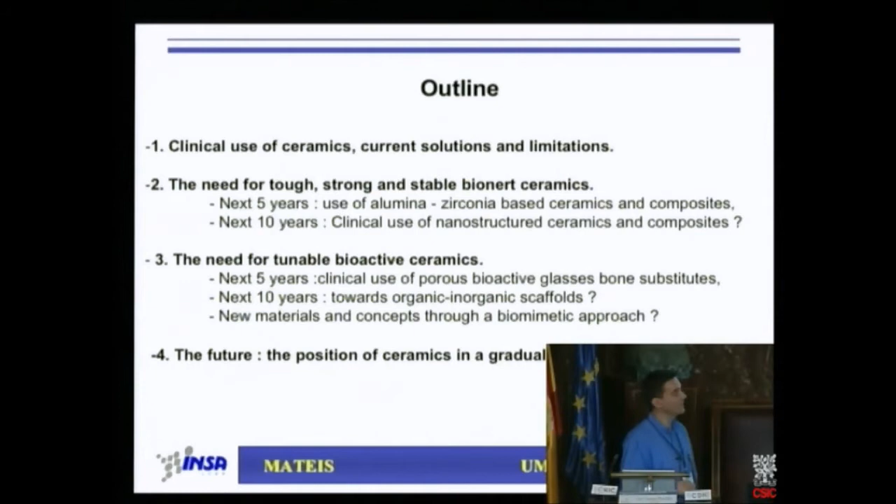So we foresee for the next 5 years the use of alumina zirconia-based ceramics and composites, and maybe in the future clinical use of their nanostructured versions, so nanostructured ceramics and composites. And then I will go towards the need for tunable bioactive ceramics with the use of porous bioactive glasses bone substitutes, the use of organic, inorganic scaffolds, and new materials and concepts through biomimetic approaches.

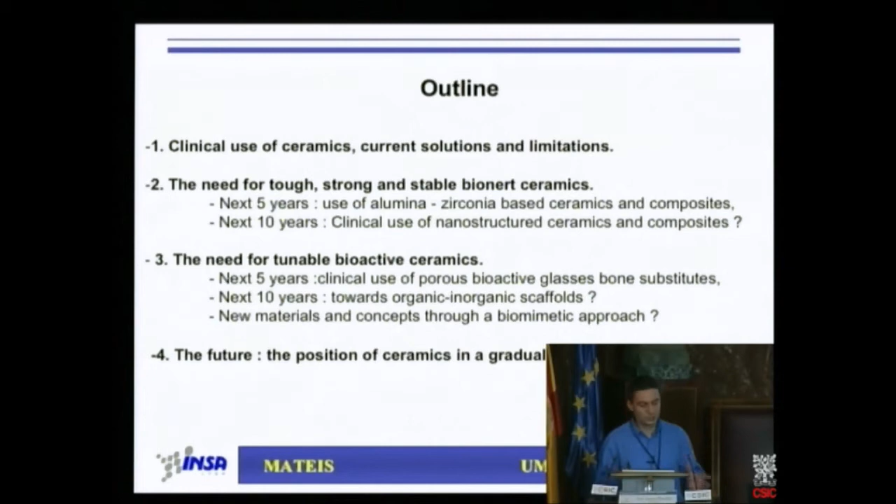And then I would like to conclude my talk with what could be the future position of ceramics in a gradual surgical approach. So we have already talked about ceramics for hip joint application, but just let me summarize what are the specifications for this use. So as you know, ceramics have been used in the form of alumina, mainly alumina, and also, let's say in the 90s, with YTZP. So bioinert ceramics are used for hip and foreseen for knee joint applications, and today we use alumina and still some companies sell some zirconia.

So the specifications are quite demanding, because we use ceramics for the femoral head and for the cup, and so we have to resist wear, so that's the first issue and the main issue in orthopedics. So these are two bearing surfaces. As we said before, ceramics are well suited since they have low roughness, also low wetting angles, high hardness, so low wear rate. We have also to resist significant mechanical loading, especially when you are walking or running.

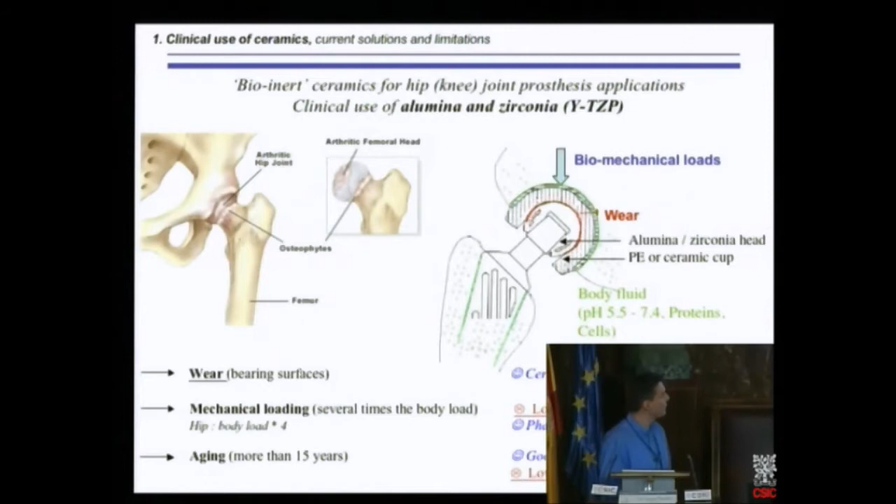You have several times the body load which is applied to the hip joint. For example, for the hip joint, only by walking, this is 4 times the body load. For the knee joint, it can be 6 to 8 times the body load. So that's quite significant and demanding mechanical loading. So as we said before, alumina has a modest crack resistance, and that's why YTZP was used in the 90s because of phase transformation toughening.

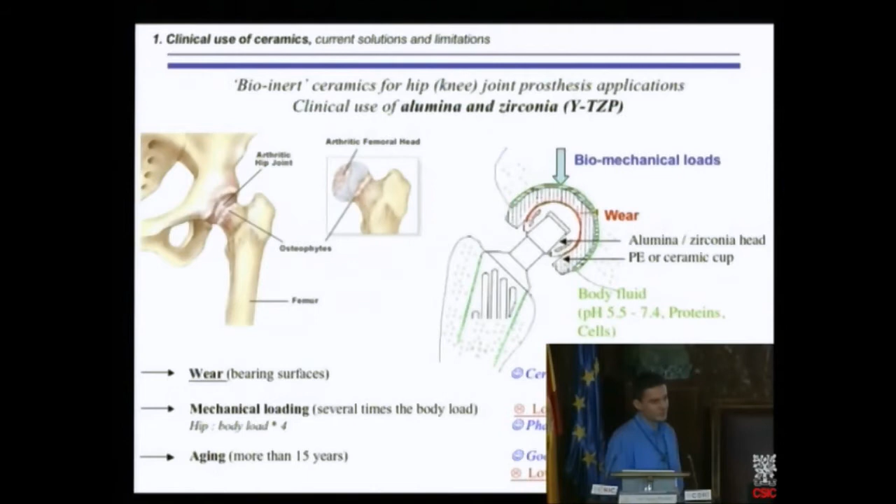And of course, the material has to stay in the body for more. We expect more than 15 years. So it should be stable all along this life. So there should be no aging, no change in the material within 15 years or maybe more for the next generation of prostheses. So ceramics are inert, we know that, but we have to talk about low temperature degradation of zirconia also. So we have seen this before in my first presentation.

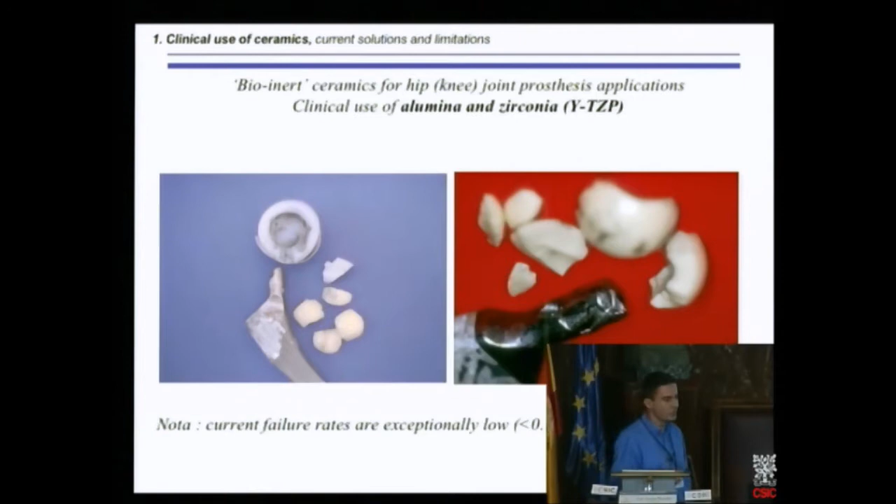We can have some failures. The failure rate is very low, less than 0.1%. We said for Biolox alumina, for example, 0.02%, so that's quite low. But we are limited in terms of designs with alumina. So we have designs which are limited in the case of alumina. We have also talked about slow crack growth. That's another important issue. I won't go again into details in the process, but we know that ceramics are sensitive to slow crack growth, so we need ceramics with a higher resistance to slow crack growth.

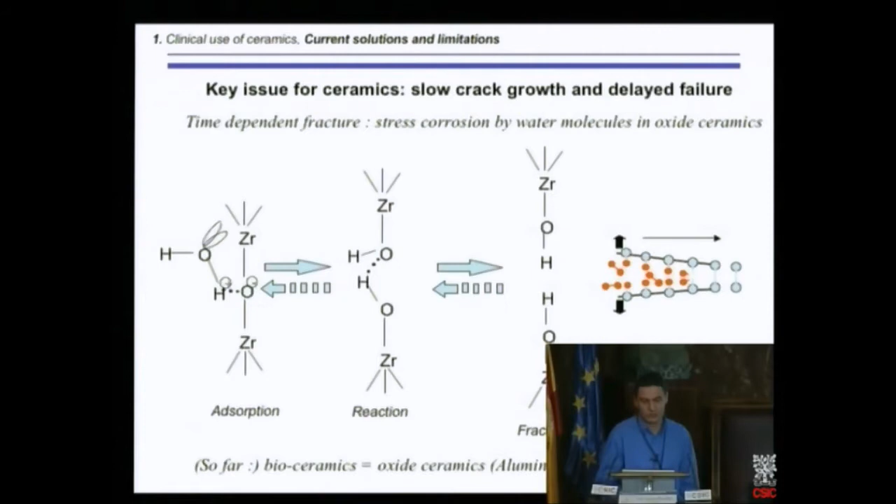If we take biomedical ceramics, unfortunately, they are all oxide ceramics. Alumina, zirconia, hydroxyapatite, tricalcium phosphate, all calcium phosphate-based ceramics are also oxide ceramics. So we expect that so far, all bioceramics are intrinsically sensitive to slow crack growth, especially stress corrosion by water molecules. We also investigated that aspect, and we said that it was important to investigate the threshold below which no crack growth should occur, and of course the toughness. But for delayed failure, what is more important is the threshold.

And we can say that there will be no fracture at all, no risk of fracture, if the applied stress at the implant is everywhere lower than a limit, which is quite simple to calculate. This limit is given by the ratio of the threshold, KI0, upon the square root of the crack size. So we can play a role on the process, because the crack size is here, and we can play a role, and we have shown that before, on the threshold below which no crack growth occurs.

So we know that a larger threshold will mean a larger range of designs without any risk of delayed failure. And so the current solutions now have low failure rates, but on a limited range of designs. We are not able to make alumina 22mm heads. There is a risk of failure. We are afraid to use alumina alone to make knee joints.

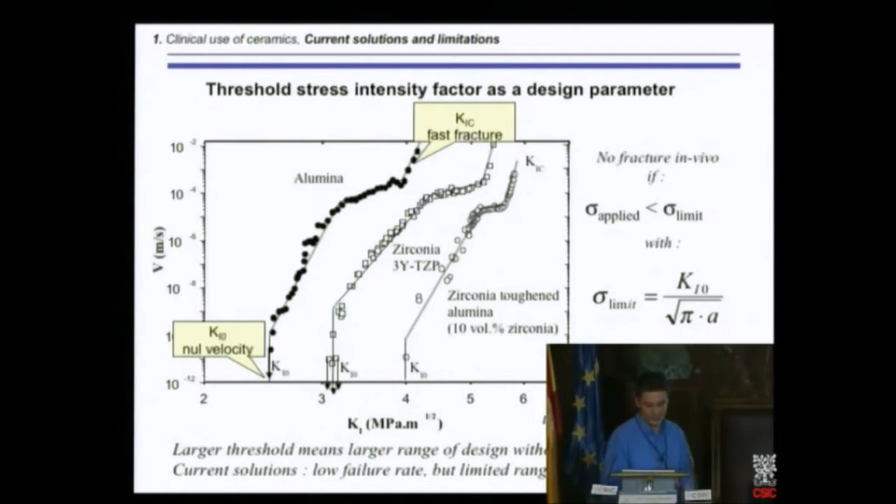And people said, it should be no problem in vivo because you are working at 134 degrees C, so much higher than the in vivo situation. But what we expected at that time is that due to water, there is a transformation of the grains at the surface. So imagine there is one grain at the surface in contact with water. This grain is transforming. Due to the transformation, you have microcracks and tensile stresses on the neighbors. So the neighbors are transforming. And neighbor by neighbor, the transformation occurs.

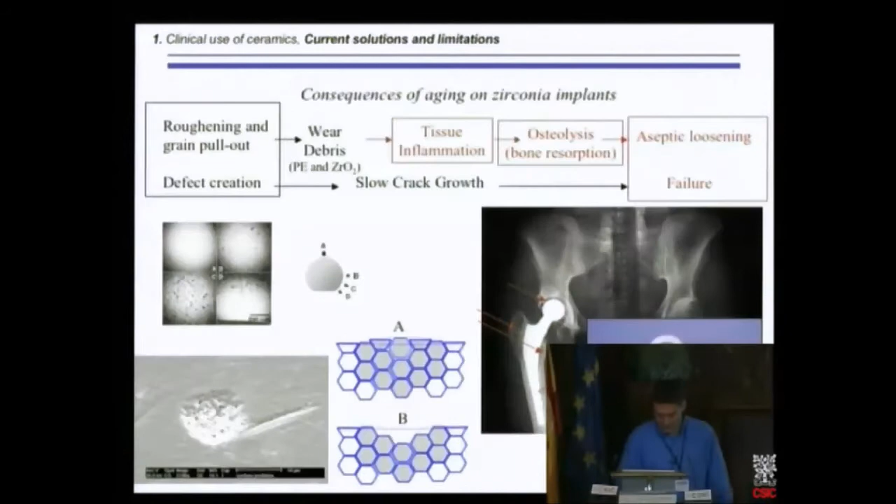What are the consequences of aging of zirconia? First, we have surface uplift, because remember that phase transformation occurs by an increase of the cell of the zirconia, so an increase of the volume of the grain, there will be some surface uplift with time. We see it clearly here. This white zone is related to surface uplift. So if you're wearing against polyethylene, for example, you have a wear rate increase of the polyethylene due to this surface roughening of zirconia. That's the first point.

Also, this is a micro-cracked zone because we said that the grain, while transforming, leads to microcracks all around the area. So grain pull-out is quite easy. So roughening and grain pull-out. Here is the surface of zirconia femoral heads after some years in vivo. Not many years. I don't remember exactly, but 3 to 4 years.

What you see is that you have some craters at the surface of the zirconia implant. This is due to the fact that this transformed zone has been pulled out, and you have a lot of pull-out, and this crater means transformation, and so this grain pull-out. So the consequences of aging are clearly roughening and grain pull-out. This means wear debris, and remember what we said in the first presentation. Wear debris means tissue inflammation, bone resorption, and then aseptic loosening, and the need to change the hip component.

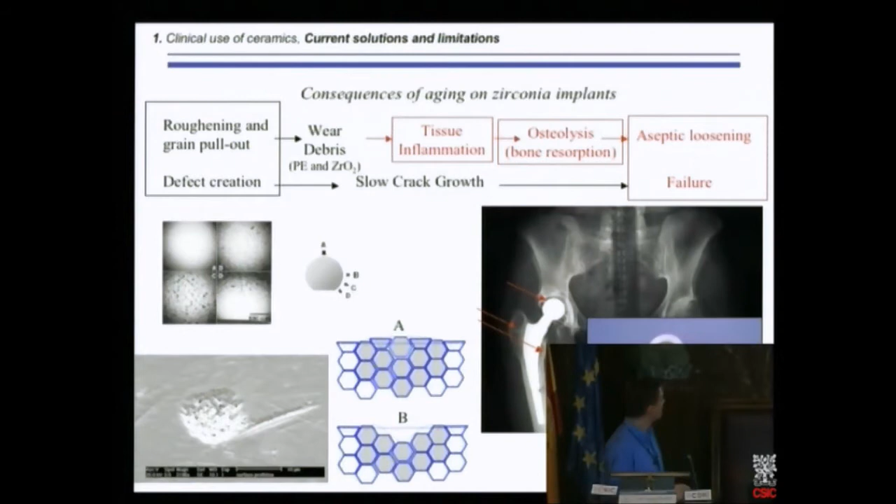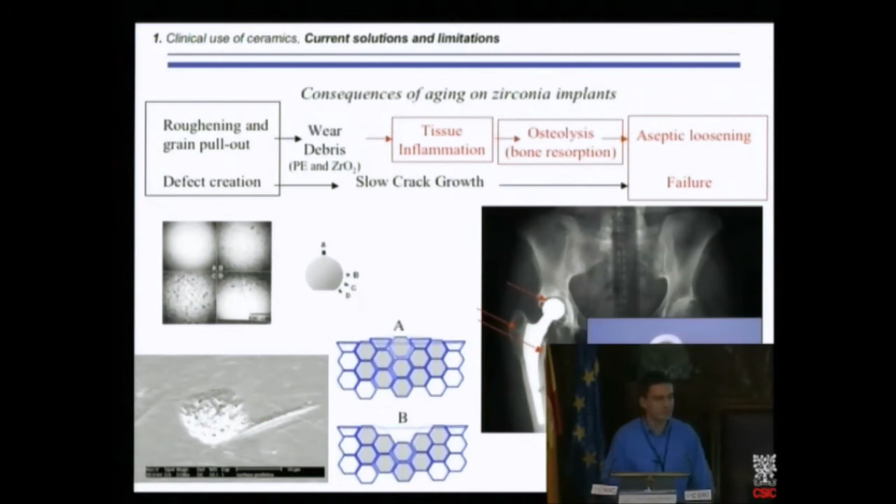Another important and maybe catastrophic issue is that you create defects. A crater like that is a big defect, 10 microns or more in size. You have to remember that it's a large flaw, much larger than the grain size, for example. So this large flaw can propagate due to slow crack growth, and then you mean delayed failure. And that's the case, for example, of Saint-Gobain Desmarquest prostheses in 2001 and 2002. So defect creation means slow crack growth and risk of delayed failure.

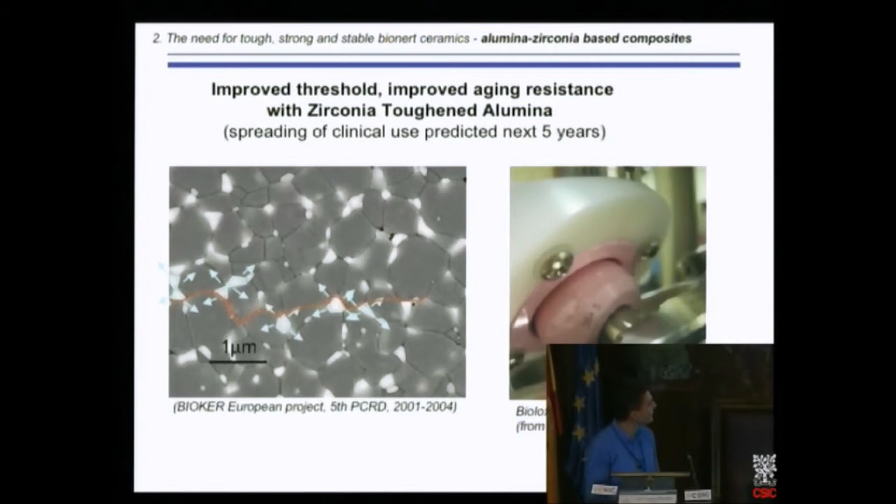So we want tough and strong ceramics, but we want also stable ceramics. So that's why we said maybe we can use zirconia toughened alumina. So that's the first strategy, and it's already under clinical use from CeramTec in the form of Biolox Delta ceramics. So this is a Biolox Delta ceramic mounted on a hip simulator. The pink color is due to an addition of chromium, but it's quite a standard classical alumina zirconia composite.

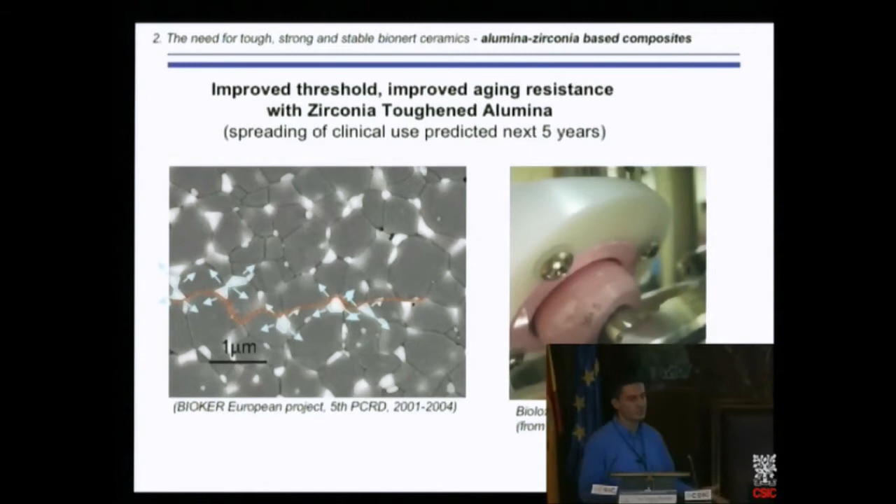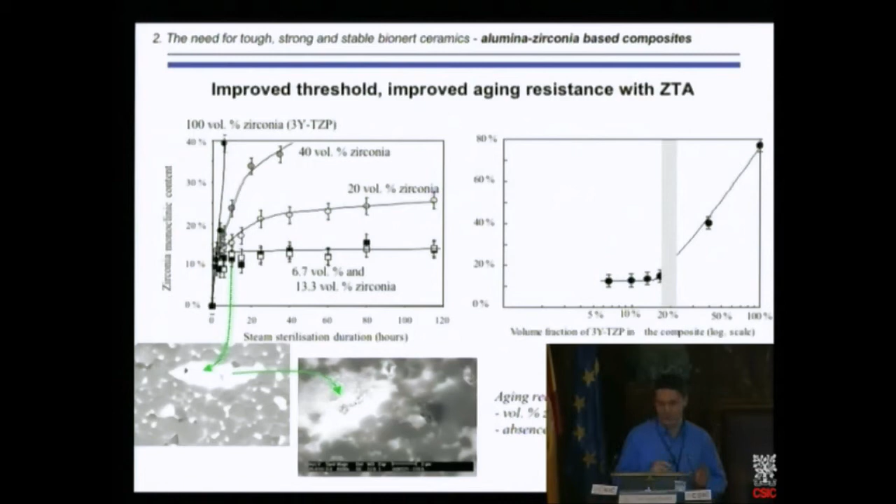I just want to emphasize these two graphs in which I have an alumina zirconia composite in which we have quite large zirconia aggregates. Unfortunately, with this composite, you will have aging of these aggregates. So if you process an alumina zirconia composite, you will need to have a perfectly homogeneous dispersion of these zirconia particles inside the composite. If not, you will have aging of the zirconia aggregates. So it is before aging, not the same aggregate, and after aging, this zone has been degraded by aging. So alumina zirconia composites can be a first answer to toughness, strength, and good stability.

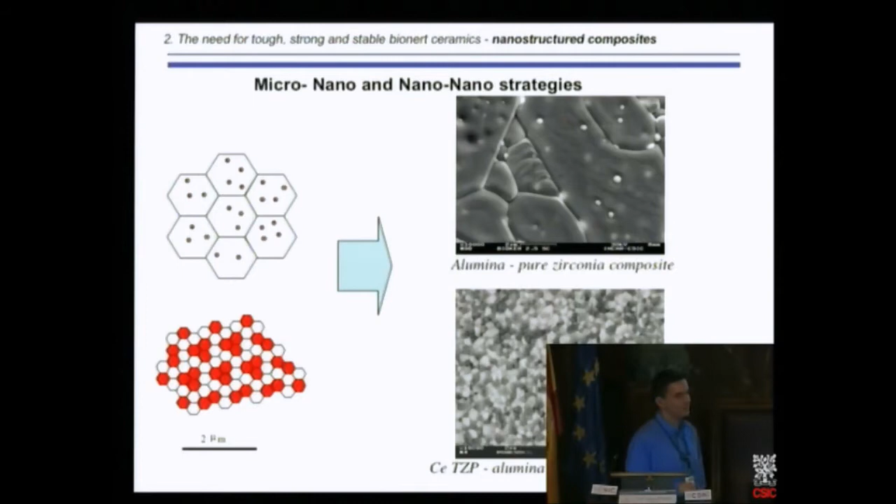I think someone said before that within the NANOKER project especially, we are able to process nanostructured composites without handling real nanopowders. So the idea of partners in the NANOKER project is to post-dope a powder, let's say an alumina powder, with a precursor of zirconia. It can be an alkoxide, or it can be also inorganic salts.

Then you post-dope submicron alumina, make thermal treatments, and by these thermal treatments, the precursor forms first a vitreous phase, an amorphous phase, and then increasing the thermal treatment, you have zirconia particles strongly attached to the alumina, which are formed with temperature. And playing with the temperature of the thermal treatment, you can change the amount and especially the size of the zirconia particles. So you can really tailor your micro-nano powder with the thermal treatments quite easily. And you do not handle any nanopowder, since this is a micro powder and a precursor.

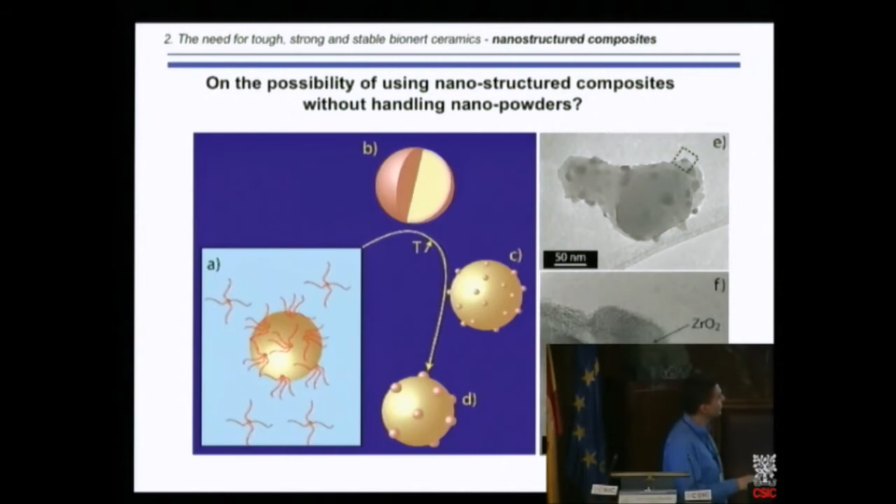And then you obtain something like that, in which you have an alumina grain, in which you have zirconia grains which are strongly attached, really nano zirconia grains which are strongly attached to the alumina powder. So with this kind of strategies, you obtain real materials like that.

Here is V versus K1 curves. I've bored you with this V versus K1 curve today, but that's important for implants especially. This is alumina, YTZP, so current solution in orthopedics, I think also in dental field. This is conventional ZTA, and this is the nanomicro and the nanocomposites. So with both, we have a strong increase of the threshold.

So we have now clearly new options for future ceramic implants. This means if we have larger threshold, we have wider range of designs. We will be able to process hip and knee resurfacing implants, which are minimally invasive. Again, I can see this poster. This is a minimally invasive implant, resurfacing implant, much less invasive than current implants. And we foresee the first clinical use of ceramic knee prosthesis based on that composites.

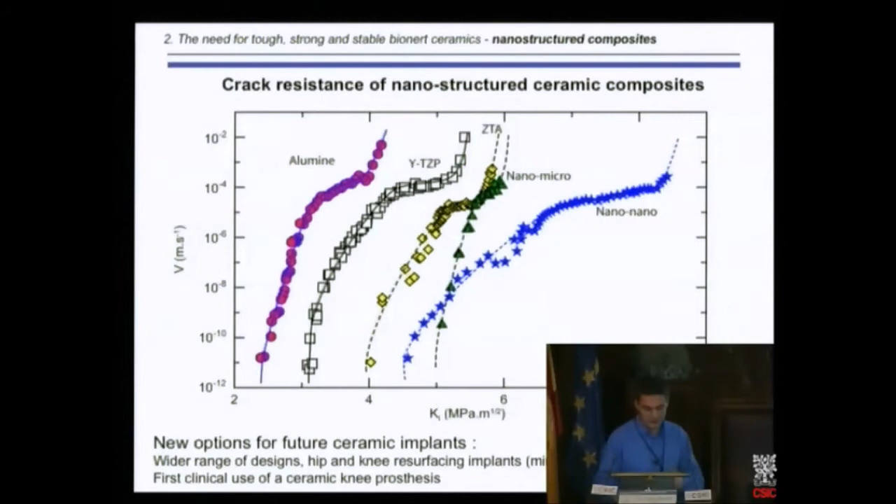So what about the resistance of real parts? Because I said before, okay, you can show nice strength, nice toughness on small samples. What about components? So we have made some crack resistance, load to failure of these nanostructured versions of ceramic composites. And the FDA standard approach to do so is this way. It's quite a simple compressive test, burst test, in which the femoral head is here, and you push towards the metallic taper until the ceramic breaks.

So what about these new alumina zirconia nanocomposite prototypes versus current alumina and current TZP ceramics? So here is the load to failure of commercial alumina. 7 tests were done for each material. This is the standard deviation. Zirconia, 3YTZP. So reminder, modest crack resistance, stable. Here, high crack resistance but not stable. And here, what you find is highly resistant and highly stable.

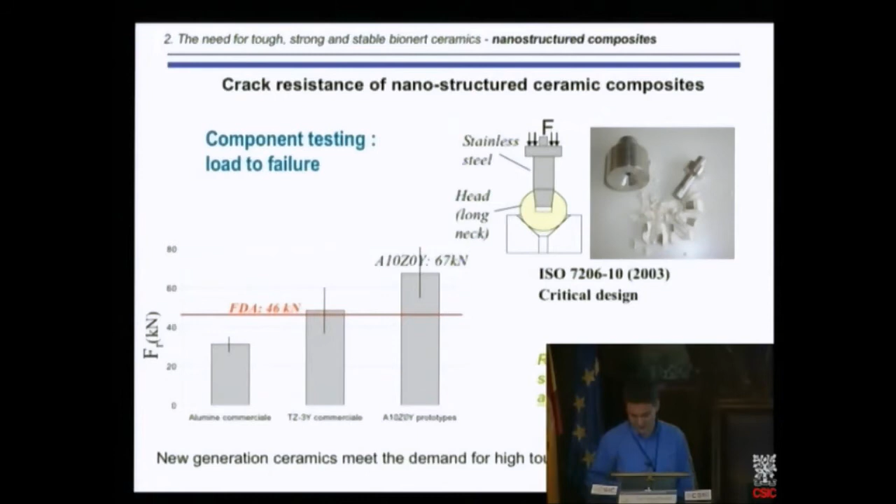In terms of numbers, the FDA specification limit is 46 kilonewtons, so that's quite a lot. You have to resist 46 kilonewtons for this type of femoral heads, and we resist clearly much more than that, 67 kilonewtons, compared to less for the TZP for this kind of design, and much less for alumina. So we have now a new generation of ceramics meeting the demand for high toughness and stability. And for these two composites, no decrease of strength was shown even after 50 hours in autoclave. Believe me, it's about 150 years in vivo, so that's much more than reasonable.

So we can go now to new device concepts. Current solutions are this. The real current solution in clinical use is a metallic femoral stem, sometimes a ceramic femoral head, and a polyethylene cup. Don't you think it's quite invasive for the bone stock? When the clinician has to place this, he has to cut the natural femoral head, to drill a hole here and to place these large pieces.

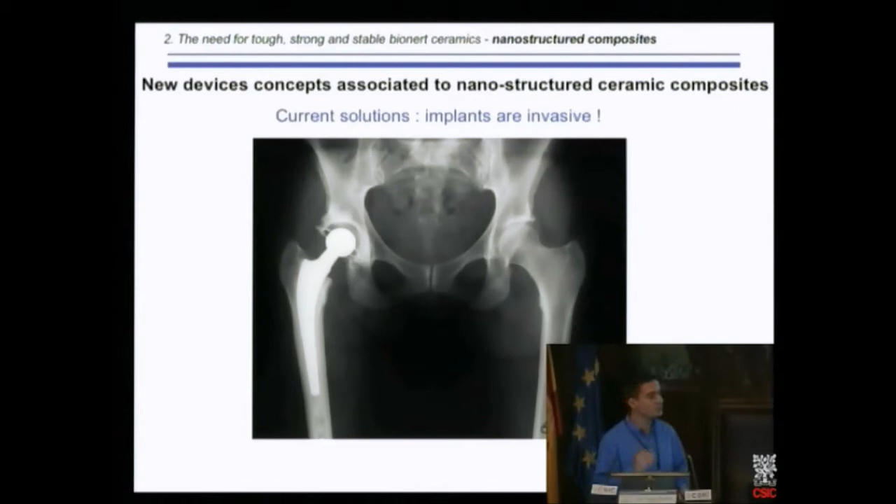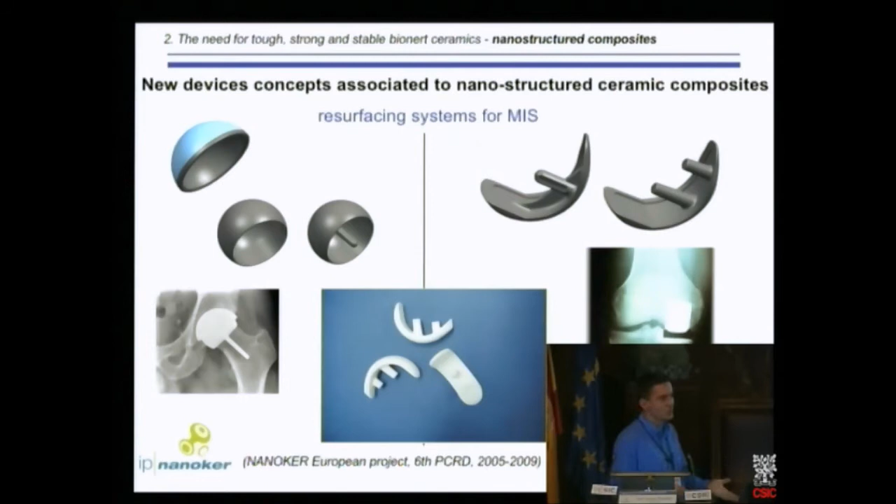So the idea today is to make minimally invasive implants. And that's the way we are thinking today, to use these nanocomposites to make minimally invasive ceramic implants for the first time. So this kind of hip joints, much less invasive than current solution, and also knee joints. Sometimes you have only one condyle that is degraded due to a problem with cartilage. So just change what you have to change and not a lot of bone stock. So this is the first part of this talk about the future of ceramics.

Now we are going to the, yes, I have 22 minutes left.

So we are turning towards the bioactive ceramics, especially for bone substitute applications and tissue engineering. The idea of these bioactive ceramics is to put a ceramic, or material in general, as a bone substitute which should induce or could induce a positive bone response and favor bone ingrowth. So let's talk first about bone. What is the bone structure? What is the bone composition?

Here is a bone, not a human bone, but a rabbit bone. You can see a structure like that. So it's open pores like that at low magnification. At higher magnification, you can see that there is a specific roughness at the surface, and at still higher magnification, you can see that there is a micro roughness at the surface of the struts, of the pores. So this means that, and we know that, there are some hydroxyapatite grains, but they are very, very small.

So the bone is consisting, for the mineral part, of hydroxyapatite grains, but at the nano level. So the hydroxyapatite grains in bone are really nano. And concerning the composition, of course, we have an inorganic phase, 60 to 70 weight %, which is calcium phosphate, a kind of hydroxyapatite, to be simple. And also there is an organic phase, which is collagen. And the organic phase plays a great role on the toughness and the energy to failure of the bone.

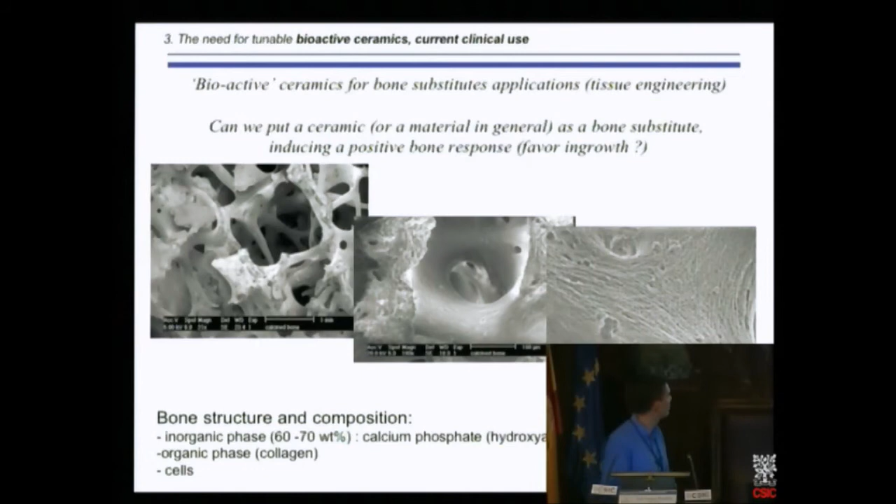And of course, we have the cells. So if we make bone substitutes, we have to clearly think about the bone cells, which are responsible for bone remodeling. Each year, even the adults, about 10% of your bone is remodeled. So in 10 years, all the bone is remodeled completely. So we have bone cells that are responsible for bone remodeling. If not, bone is too brittle, too fragile.

So we have here in this picture, given by a biologist, the green part is the bone, which is already formed. What we can see here is that a part of this bone has been damaged, has been resorbed by some cells. So there are some cells responsible for bone resorption, and these are called osteoclasts. So this means that in your bone, you have cells that are active for bone resorption.

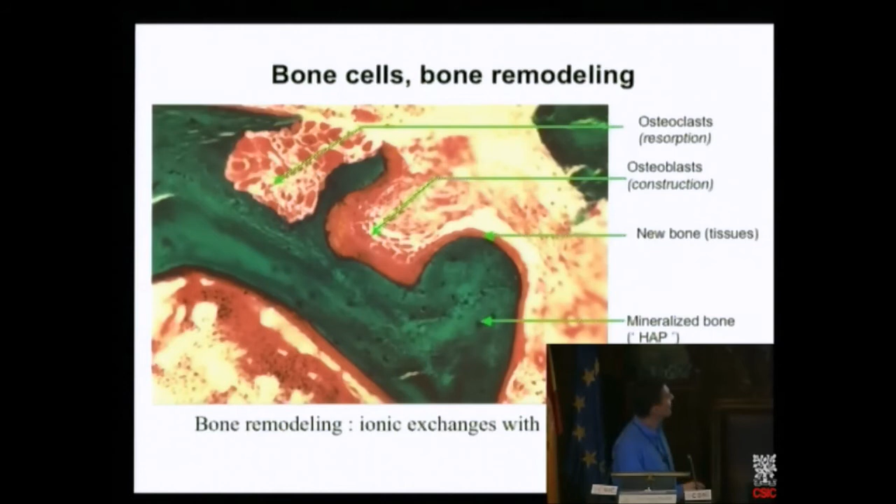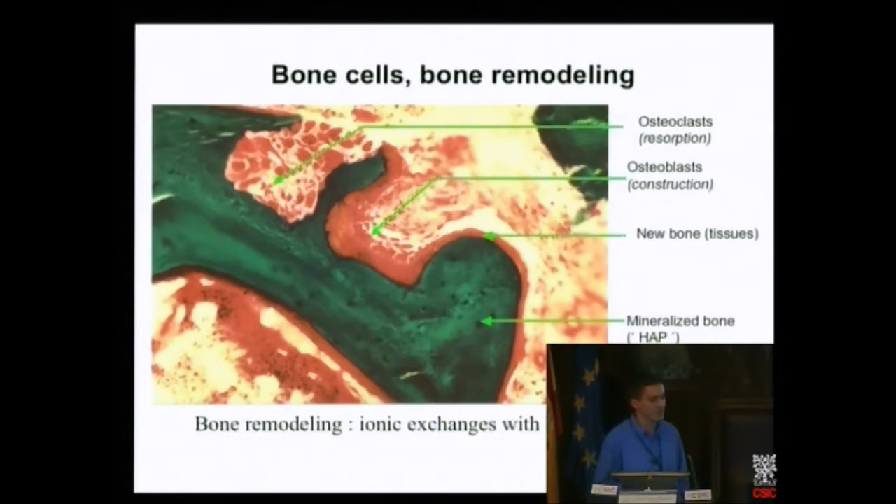And after this bone resorption, there is a reconstruction with other cells, which are called osteoblasts. So here is new bone, which is highly rich in collagen, in organic phase, which has been reconstructed by these cells. So of course, you have to take into account the activity of these cells versus your new material for bone substitution. And especially for bone remodeling, we need ionic exchanges with body fluid, especially calcium and phosphate. That's why we use calcium phosphate ceramics and glasses.

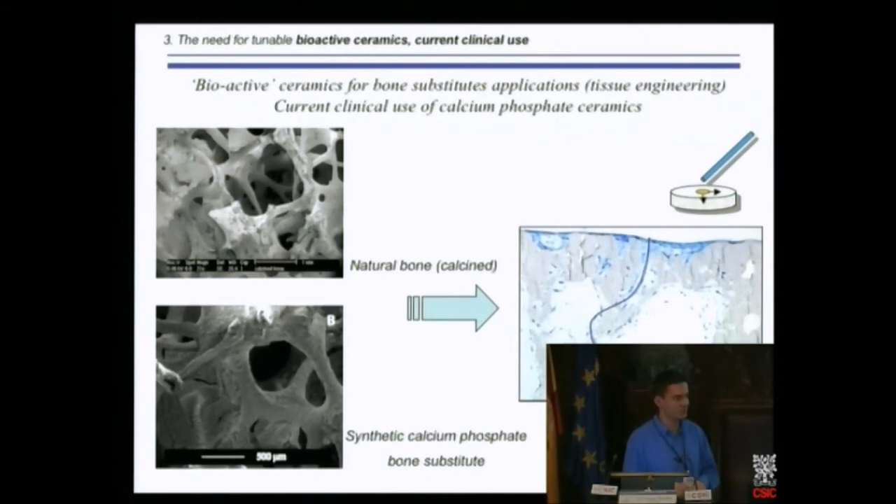So we have put some cells at the surface of such substitutes, and after 21 days, we observe that all the surface is covered with these blue dots. These are cells which have been colored. And more important, the cells have now proliferated inside the bone substitute. What you see in blue is the path followed by the cells along the interconnections between pores. So interconnection between pores is really important for this kind of material. The cells are able to pass through the interconnections, and then they adhere to the surface of the pores.

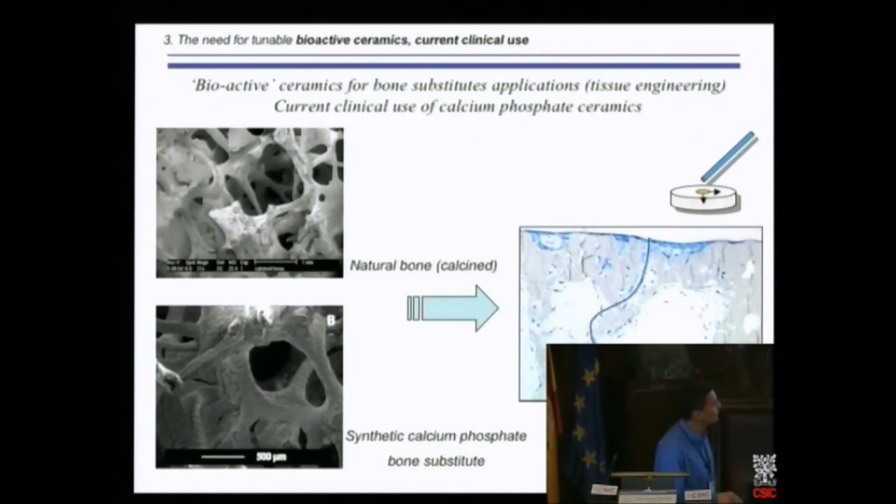So what might be important also is the microporosity, or micro-roughness, you have at the surface of the pores. So an important factor is the macro interconnection between large pores, but clearly also important is to play with the microporosity. What is the roughness at this surface? And what we have seen is that osteoblast cells really like micro-rough surfaces.

So they need surface micro-roughness. So interconnection with pores and microporosity is really a key factor for using bone substitutes.

So what about, let's say, the future? It's quite near future, since we already have developed this and it's already sold by a company. We can incorporate drugs. So you can play with these calcium phosphate ceramics by making drug release. And especially what we have made is a simple strategy to release antibiotics. And it's important to release antibiotic at the site where you implant the bone substitute.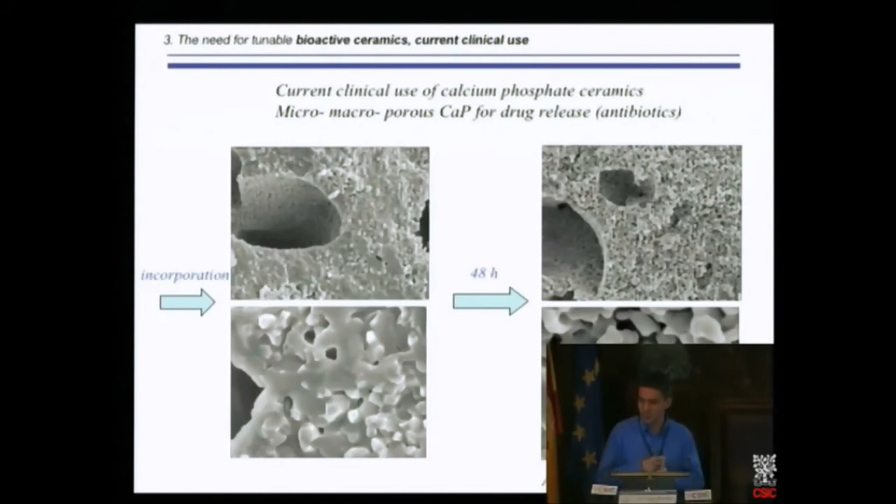And after 48 hours, not less, not more. So not less, why? Because if not, you have too much antibiotic at the same time. Not more, because if not, you have some resistance of the bacteria to the antibiotic. So with 48 hours, there is no more antibiotic in the bone substitutes. And we have tested that also on animals, and now it's on the market. So how to play with that? You have to play with the porosity features, pore content, pore size, for the speed of diffusion.

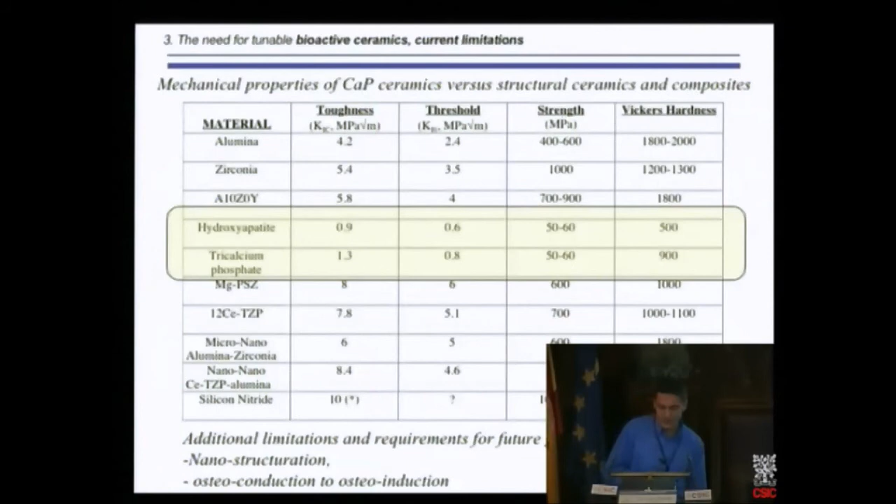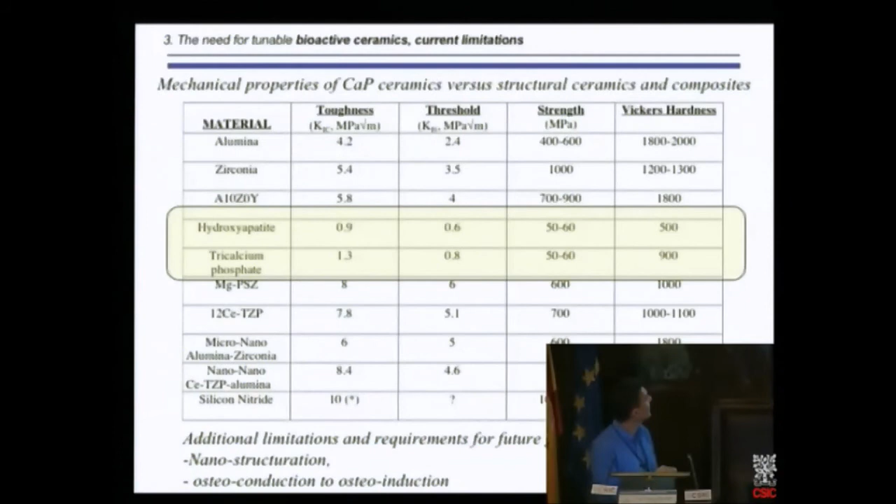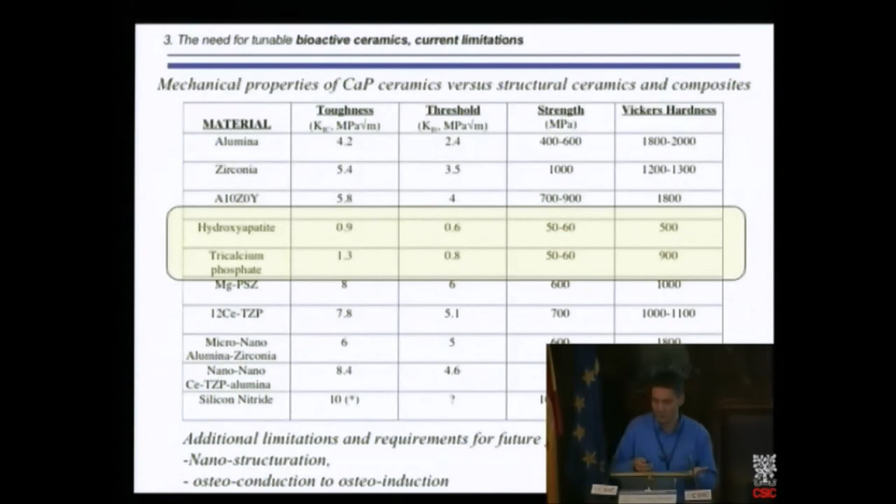So one important problem with calcium phosphate today is their mechanical strength. Again, mechanical strength. I am a monomaniac. What you see is the toughness. Hydroxyapatite, tricalcium phosphate have a toughness of only 1. This is about the same as glass. So these are really brittle materials. So one way of improving their properties and their application is to improve their crack resistance.

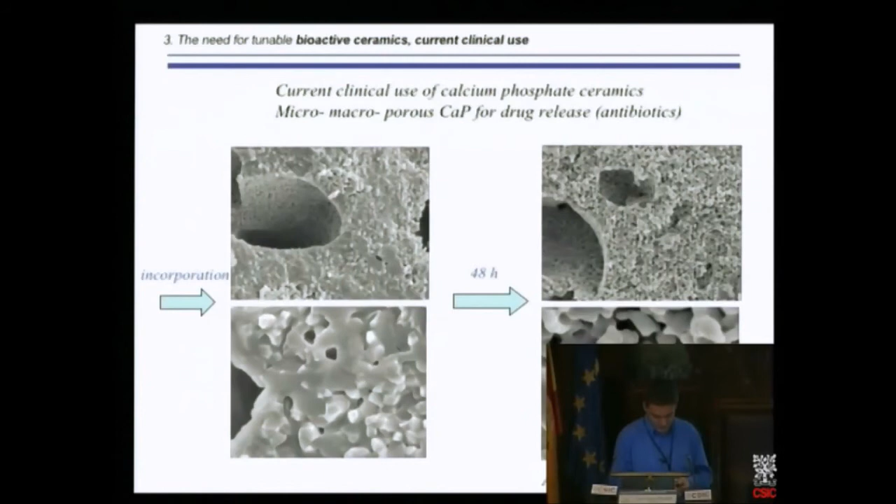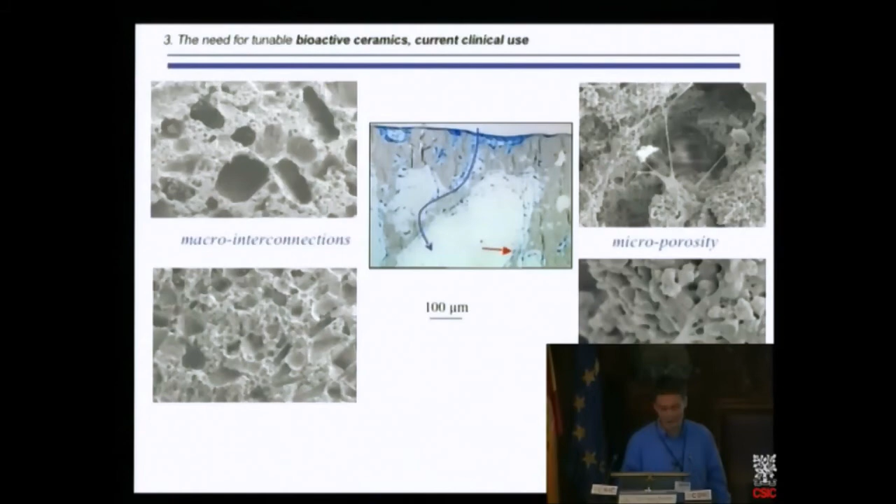Another important factor is, are we able to make nanostructuration? Because if you look at these pictures, this is some microns in size. The grain size is about 1 micron or something like that. So can we decrease the size and go towards nanostructuration? So we can make nanostructured bone substitutes by using bioglasses.

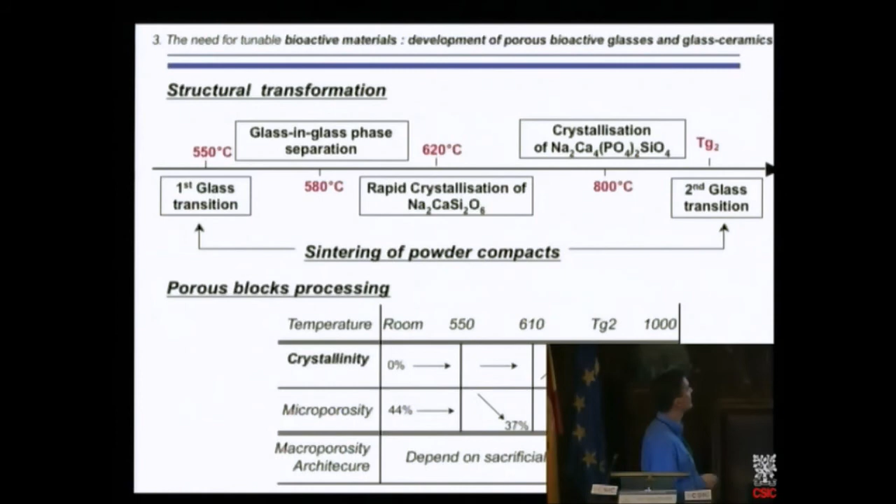What we have shown is that using bioglass powders, you have the opportunity to profit from some transition and some crystallization process. When you take a bioglass, at 550 degrees C, you have a first glass transition, then the glass-in-glass separation, and then the rapid crystallization of this crystalline phase. And then at this temperature, you have a crystallization of a second phase, and then if you go towards larger temperature, you have a second glass transition. So you can play with this crystallization process to sinter nanostructured glass ceramic porous bodies.

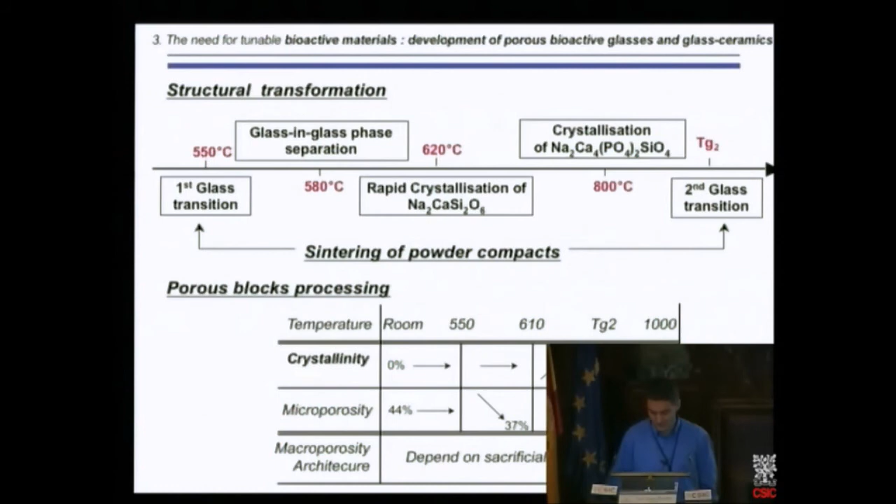And we have shown that the crystallinity changes the bioactivity of the bioglasses. So here are the images of bioglass-derived porous scaffolds. We think this can be really an interesting alternative to calcium phosphate. So we have worked on that, especially also with a group in Imperial College, Aldo Boccaccini and co-workers. We have shown that with bioglasses, it's possible to control the crystallization process. We have really nanocrystals, and it's possible to control the porosity by sintering bioglass powders.

So here are some images of a porous bioglass scaffold. Here is the image at higher magnification of this scaffold, the strut, after a given amount of time in simulated body fluid. After a certain amount of time in body fluid, we can see some carbonated hydroxyapatite at the surface. The same type of hydroxyapatite that we have in the body. So these are really nice, very small nanocrystals of carbonated apatite.

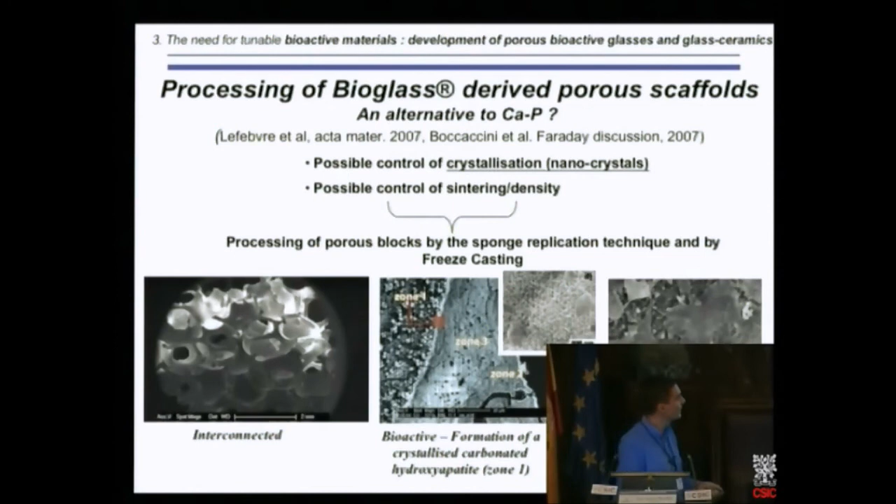And what is important is that we need to show and to check that the osteoblasts, the real cells, adhere and proliferate on the surface and through the porous blocks. And that was really the case. These are images taken by confocal microscopy, so you can see in depth inside the porous substitutes by optical microscopy. And these are confocal micrographs of cell proliferation and also metabolism kinetics on bioactive glass porous blocks.

So here is the surface of a pore. After 9 days in simulated body fluid or cell cultures, the cells are proliferating inside the bone substitutes. So the cells are in red, and with time you have an increase of the proliferation of the cells inside the bone substitutes. And what is maybe more important is that the cells are able to produce type 1 collagen.

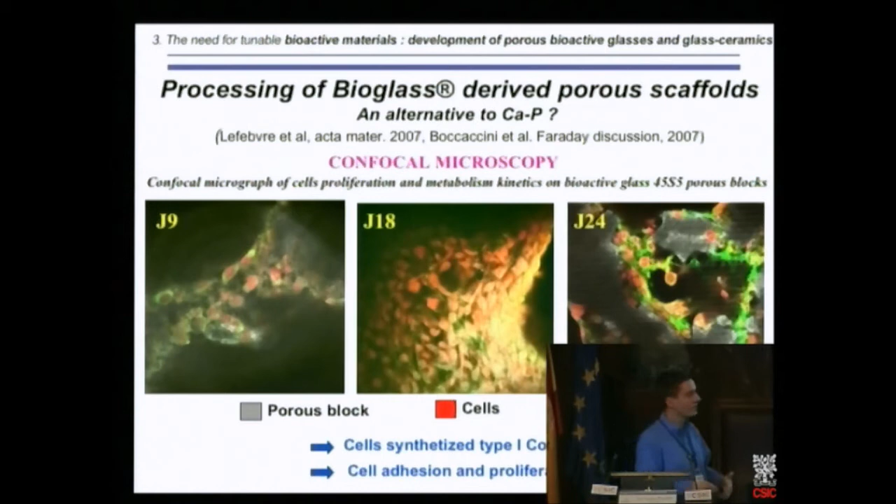So this means that they are forming new bone inside the substitutes in vitro. So now you can talk about tissue engineering, acting with these bioglass scaffolds to favor osteoblast proliferation and formation of new type of bone.

So concerning the mechanical properties, how can we improve the mechanical properties of these calcium phosphate or even bioglass scaffolds? Playing with organic matter. So this is an example of a sintered microporous ceramic scaffold which is impregnated with a biopolymer. So the method is quite simple. You have a porous scaffold and you impregnate the microporosity with a polymer, especially biopolymer. And then you make strength measurements. You make some mechanical tests.

What we obtain is that here is the ceramic, here is the crack, and you can see some bridges. What are these bridges? This is the organic matter. So we have some organic fibrils that act to resist crack propagation. So we have an inorganic, organic composite, and when a crack or microcrack propagates, you have bridging by these fibrils, like in bone. In bone, you have collagen that is able to bridge microcracks in the mineral phase.

And what are the results in terms of really of the energy to failure? What is the quantification of that? Here is the apparent fracture energy for different materials. So this is pure alumina. This is alumina impregnated with polymer with nanoparticles, impregnated once with a solution, and impregnated twice with an organic solution. So this is here pure ceramic, so very low apparent fracture energy. And here is the composite in which we have impregnated twice the ceramic with a polymer.

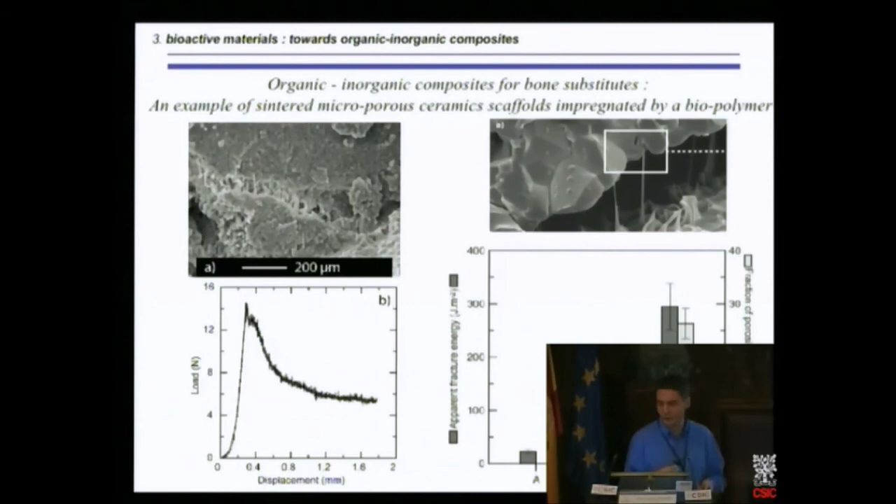Let's have a look at the results. It's more than one order, almost two orders of magnitude in terms of apparent fracture energy. So we cannot increase the strength. The strength is the same, but what is important is that the energy to failure is much more important in this type of inorganic composites.

So Tony Tomsia, I think, talked about this biomimetic approach. So just 1 minute to confirm that also this is really an interesting way for the future. So you can make biomimetism in the terms of using nacre as a biomaterial. This is the approach of some French teams, especially Lopez and collaborators. But maybe more interesting is to use nacre as a source for materials engineering. So try to mimic the structure of nacre in real synthetic material.

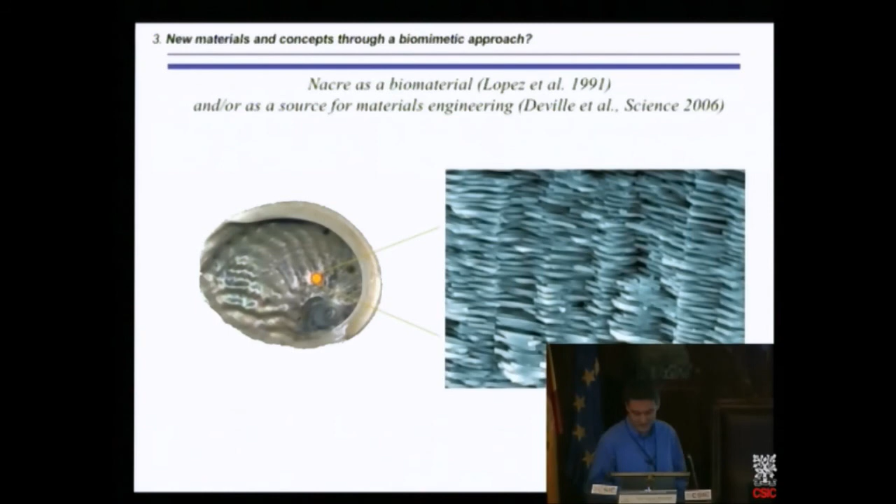So the structure of nacre is structured at different levels, and especially we have platelets like that. And Tomsia and co-workers were able to process something which is really near the structure of nacre. You have here real natural nacre, and there is a material in which you have platelets like that. And they found really impressive toughness values and toughness measurements.

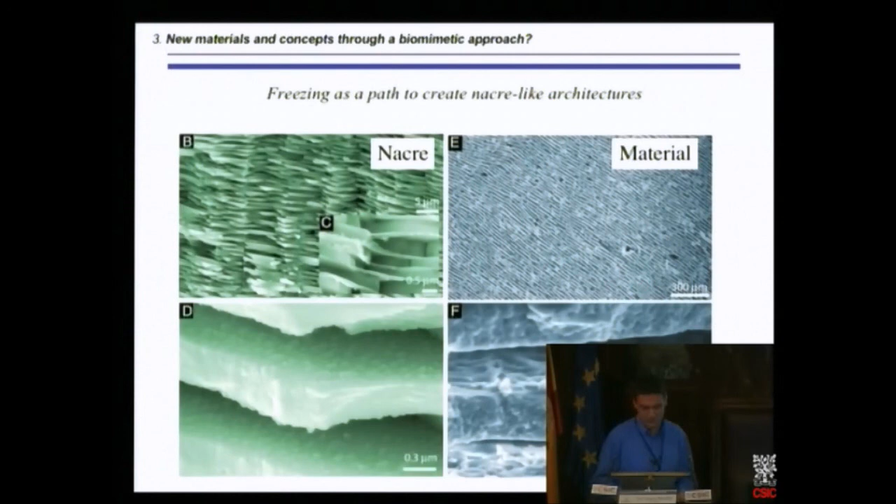So this is my concluding remark concerning this talk. What can be the future position of ceramics in a gradual surgical approach? So let's take a surgeon. What can be the first answer? The first answer will be, or should be, tissue regeneration without any biomaterial. So just with drugs or something like that. So that can be the first answer to trauma or disease. If the disease is not so big, you can try to make tissue regeneration without any biomaterial. So there is large progress in this field, and we believe that it should work in the future.

The second answer will be tissue engineering assisted by bioactive scaffolds. So this is the second answer. If the disease or the trauma is too important, you will need a scaffold, a material to induce bone ingrowth. And after this inducing of bone ingrowth, then the material has to disappear. So if it's possible, we should have bioactive osteoinductive materials which are resorbable. And that's possible thanks to some osteoinductive scaffolds that I've shown before.

The third answer will be surgery. Anyway, for some patients, we will need, even in 20 years, surgery. So what about this answer to this kind of surgery? We should use minimally invasive implants as the first answer. So we should use an implant that preserves the bone stock. And that's the case of hip resurfacing implant and uni-knee, as we discussed before.

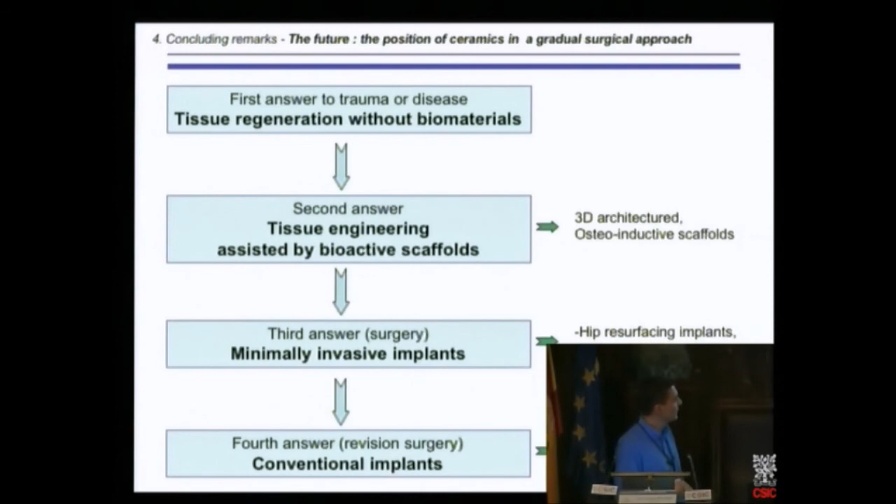And then at last, and for sure, I'm almost completely sure, the last answer will still be conventional implants. But that will be the last answer to this kind of problem with bone and cartilage. So we will use conventional implants, but conventional implants able to maintain the highest level of bone stock, and of course, as we said, tough and stable.